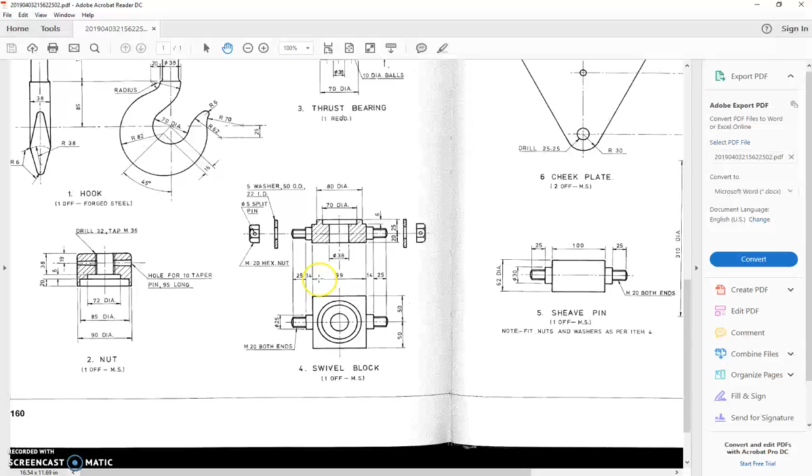I can see that it has a metric 20 thread on both ends, and another giveaway for that is the double lines that denote thread. So it's showing the outside of the thread and also the depth of the thread. Look, it's got a shoulder here that's 14 mil, 25 of thread.

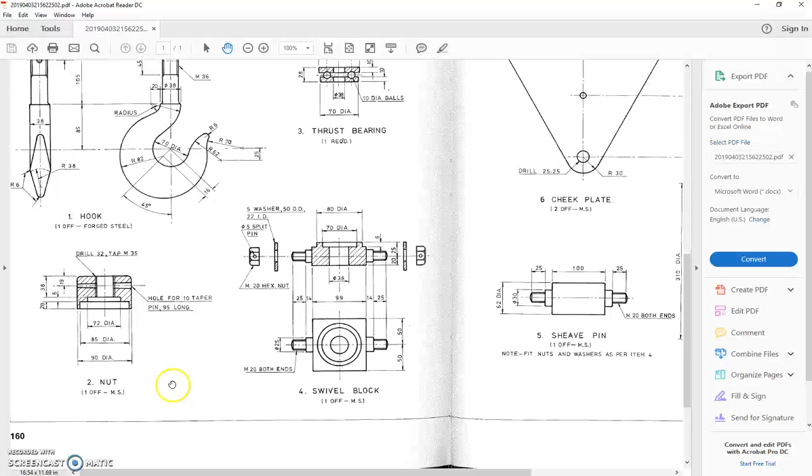These nuts and washers, we'll worry about them later. On the top, it has this ring, all right, so it sits up like that. It's 6 millimeters in height. And what happens here is that 70 millimeter diameter takes the 70 millimeter diameter of the base of the thrust bearing. Around the top of it here, 80 millimeters, it's taking that 85 millimeter diameter of the inside of the nut. So it's helping to create a barrier for dust and debris to get into that thrust bearing.

The way I'm going to draw this is very much how you see it here. I'm going to put it onto my base plane or top plane, depending on which way you want to look at it. And we'll have the front plane running through this way and that side viewed plane running through there.

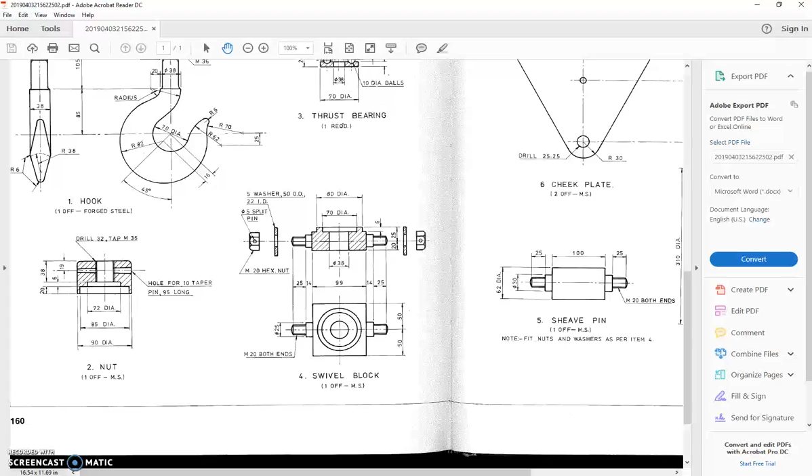Well, let's hop into drawing a new part. We'll just minimize that one. All right, so new, standard millimeter as always. Bringing up our part and our view space.

New sketch. Now, I said I was going to put it on this view here. So, depending which way you want to look at it, it's either looking from the top or the base. When I bring it in, you can see a little guide up here is this bit that says top. I do actually want to rotate that, so these little arrows up here will rotate my view cube around. So I'm looking straight down onto my XY plane this way and the other one running that way.

I'm looking at it this way because when I turn it here, that's the front. So that's going to put my drawing space in the same orientation as it is on the sheet we're taking all the measurements from. So 99 wide, 100 long.

I've changed my rectangle function from being this normal 2-point rectangle, that's what the default will be, to this 2-point center function. The way this one works is you identify the center first, really quite easy, right on the crosshairs, and then I start to drag out the size that I'm requiring. 99 millimeters wide, then I press the tab button and it flicks it over to the other dimension, 100 millimeters. Hey presto, it's done. Finish my sketch.

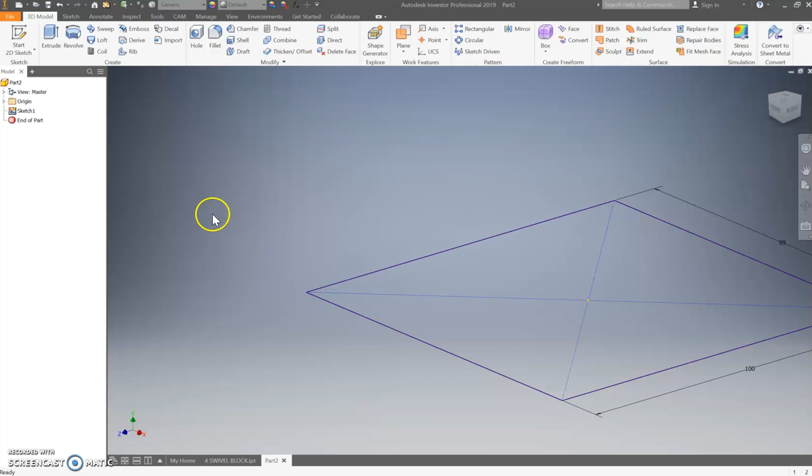Actually, you know what, I really should put a hole in the middle of this. I want to do some more work on this sketch. How do I go back to that sketch to add more into it? Just like this, if you double click on the icon, it brings it back in. Be aware though, it will probably rotate it back to its home position, so put it back how we want to be viewing it.

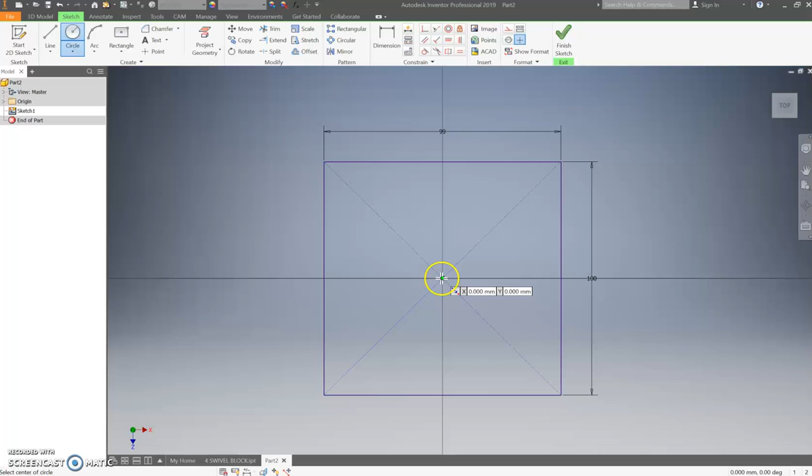In the center, there is a hole. It's essentially a clearance hole for a 36 millimeter shaft on the end of the hook. That's a fun one coming up very soon, we'll do that in a few steps. But this hole, it needs to be 36 mil in diameter. 36, enter, and away we go. Now we can finish my sketch.

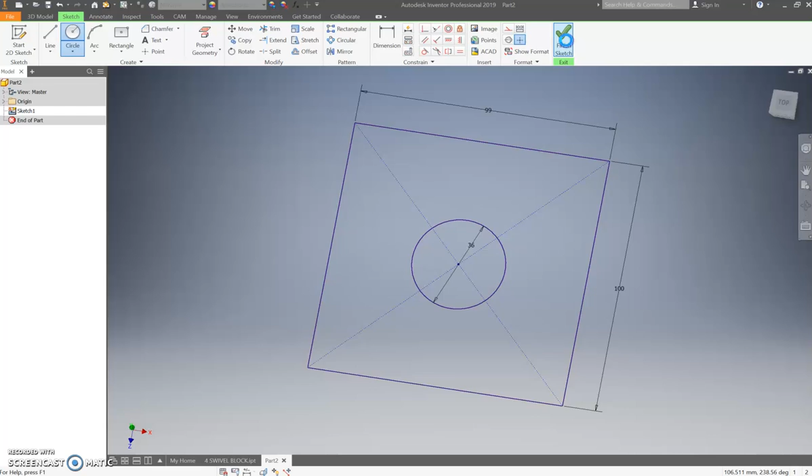We're going to extrude that up. It needs to come up a total height of 45 millimeters high, but the ring on the top, it was 6 millimeters tall. So I'm going to take 6 millimeters off, so that brings us back to 39.

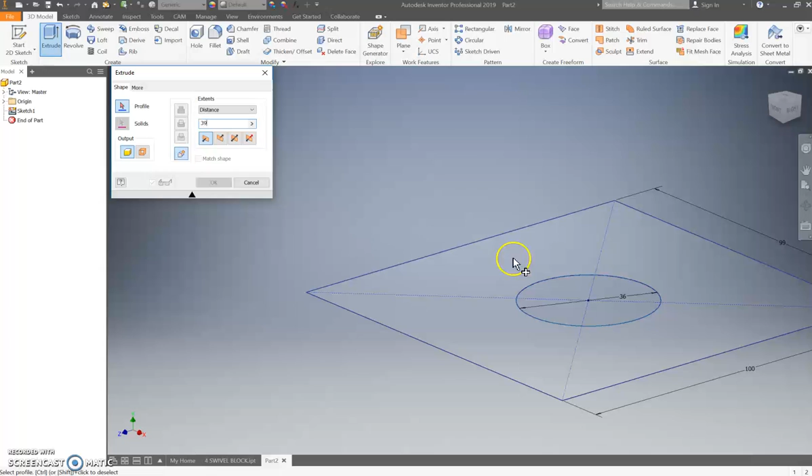Now you'll notice it's not automatically popping up and giving us that lovely extrusion straight away. That's because there's two different profiles here: there's the profile that we actually want, so inside the square and outside of the circle. If I put my cursor in the middle of the circle, it's going to project up just the circle. If I put it in that next void out, that area in between the square shape and the circle in the middle, that's the bit it's going to extrude. Okay, that's what I want.

Next, I need to put a new sketch on top of this. Just simply click on that surface at the top, and it's going to pop up with a whole bunch of icons, and that will let you start that sketch. It can let you edit the original sketch.

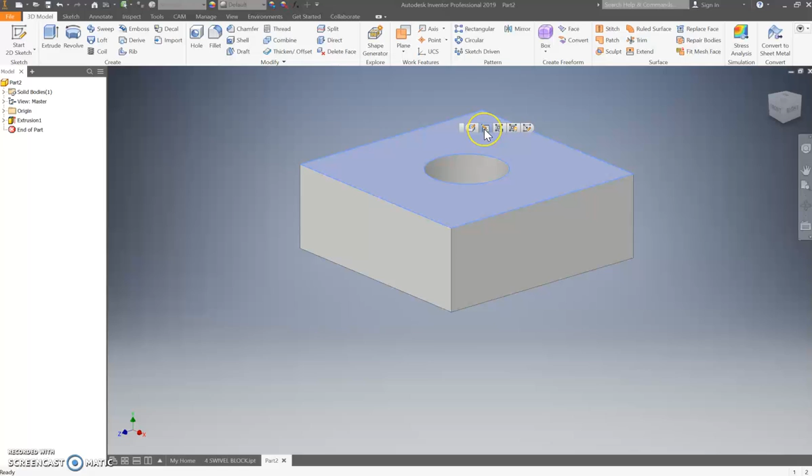You can play around with all sorts of bits and pieces in there. The last one on the right is always going to be create a new sketch. I want to draw on this surface. I'm just going to get into the habit of turning it so it's around the right way.

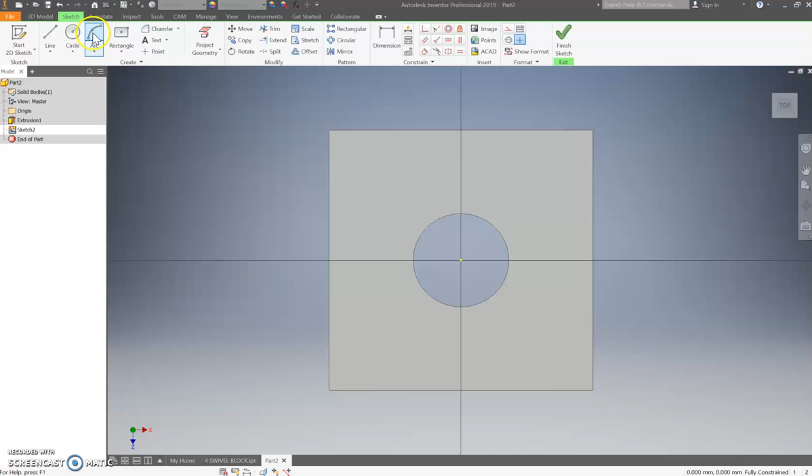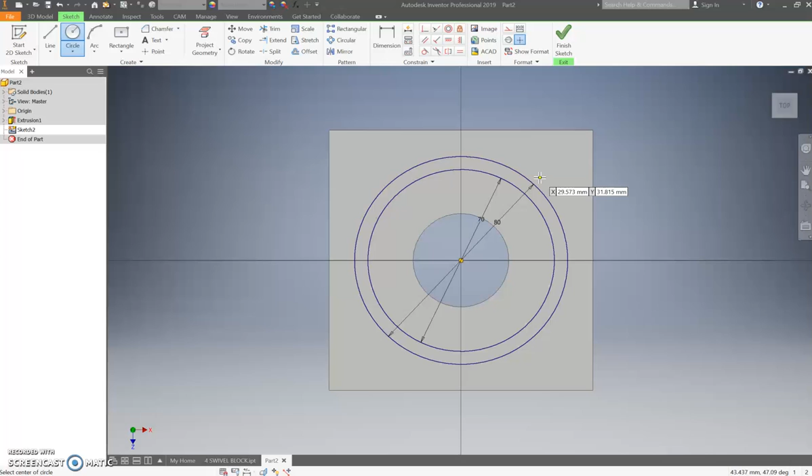I know I'm looking at it from the right direction. Sitting on top of this, there are two circles, and I alluded to their sizes before. The internal one is 70. By starting the circles on the crosshairs in the very center and identifying that point, it will lock it in and constrain it to that center point. That's one reason why I drew the base this way.

So they're both in. Finish that sketch off, and now I'm going to just extrude up that little section. It doesn't need to be 39, only 6 millimeters for this one. Okay, very good.

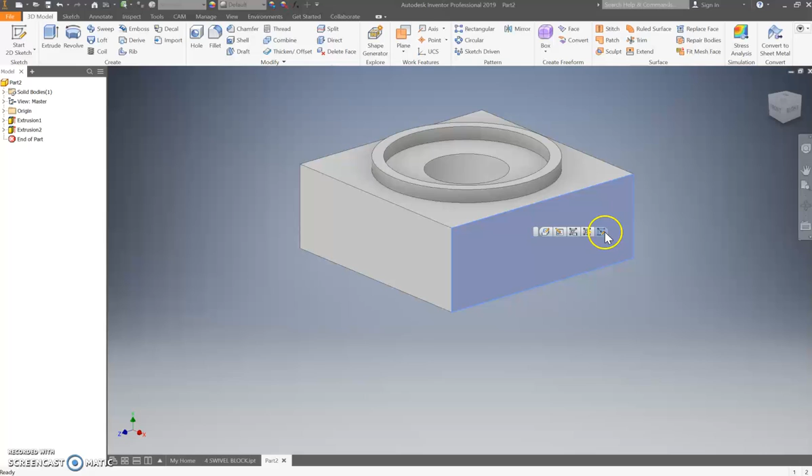Next, now look, putting these little shoulders onto this block, you could do it a couple of ways. We could just put a sketch on this surface here and draw on a circle to represent that first part. What was it, 25 in diameter?

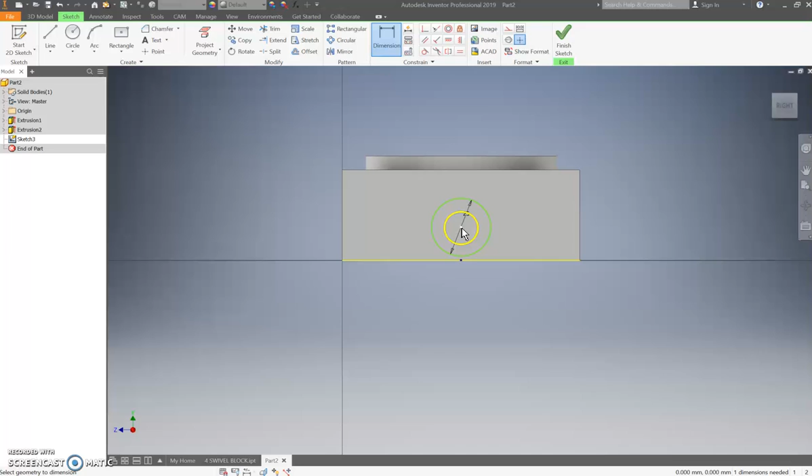I can then, this was going to go sideways. No, it's going vertical. Lovely. Line it up with the center, and I can give that a height from that baseline. All right, and I know that's sitting at 20 millimeters.

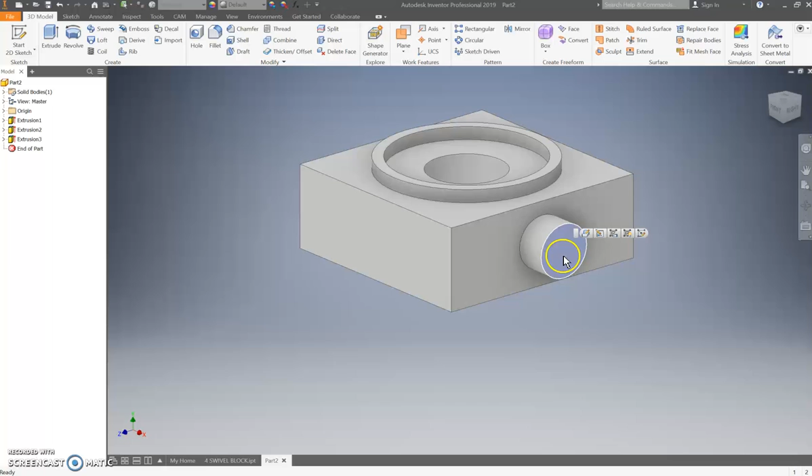Yep, so finish that one off. Extrude it out. Now it needs to come out 14 millimeters. In the center of this one, so I've just clicked on that face, new sketch, another circle.

Now this one is going to represent, now see, it won't pick up that center point. It's not turning green. If you show it the existing circle and follow it around slightly, now it recognizes that circle and you want to work with it. So now it's picking up a center point for me, green center point, yay.

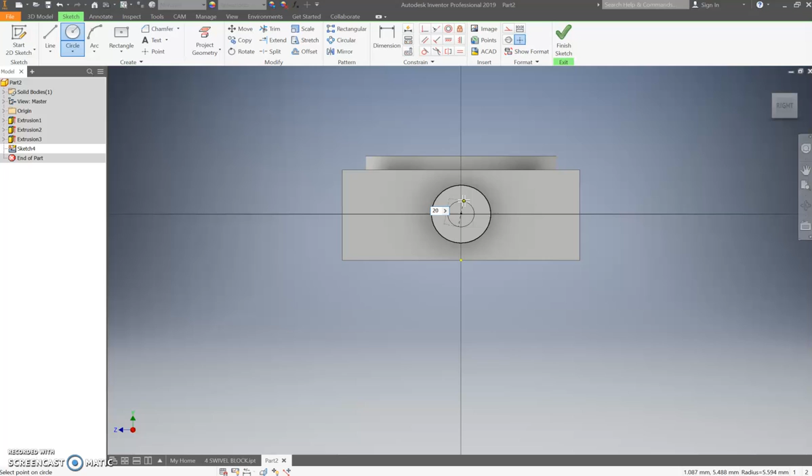Center of this one, it's an M20 thread, so the diameter is 20 millimeters. Finish the sketch again and extrude the center of that circle out, a distance of 25 millimeters. Where's 5? There we go.

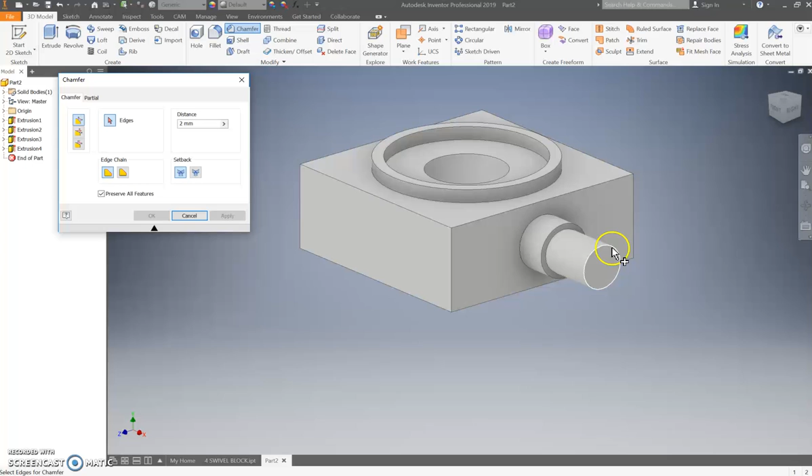Happy days. I'd like a little chamfer on the end of this because all good threads I have a chamfer on them. It's up on my other screen. Let's bring that over. Chamfer of 2 mil, right? It's a big enough object to get away with it. Okay, that's that part done.

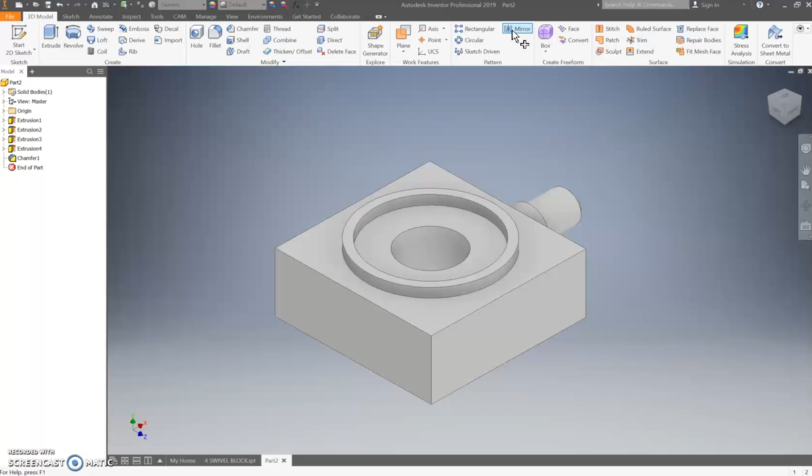Now I could repeat that same process over here, or I can just mirror it across. So the mirror command, it lives in the pattern area. Mirror. Again, that's on my other screen. Over here, please. Gives us a few options. I can mirror individual features, or I can mirror the entire thing. I want to mirror features.

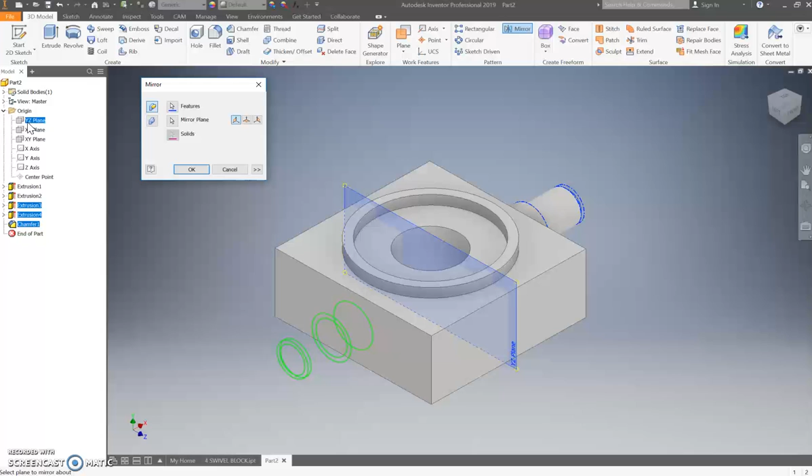I like to pick up my features from my modeling bar over here. I want that third extrusion for the shoulder, the next extrusion for the threaded section, and I also want to bring over that chamfer. The mirror plane, where does the mirror plane go? Well, I need a plane that runs through the middle of this. Where can I find that? Well, the other reason why I did this drawing on those crosshairs, I can use my YZ plane there to mirror it on, because it was centered on it. And if I hit OK, there we go. It's on.

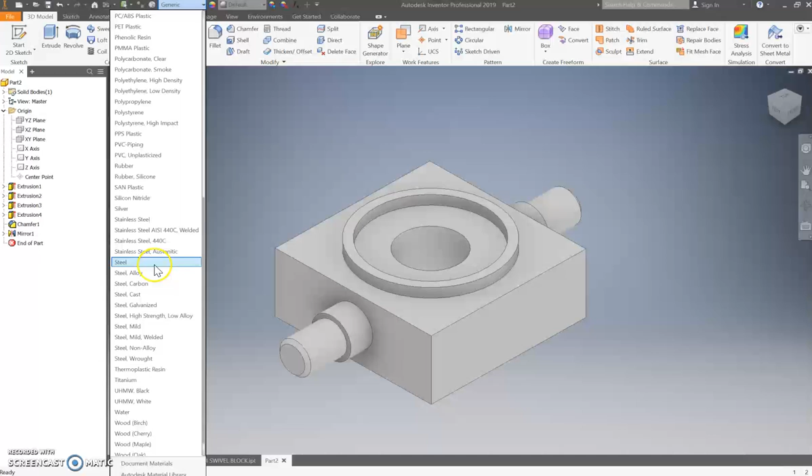Awesome. Material. It's not a generic clay, plastic, whatever material. It tells us that it is made out of mild steel. So steel, mild. What's with my eyes tonight? Steel, mild. Here we are.

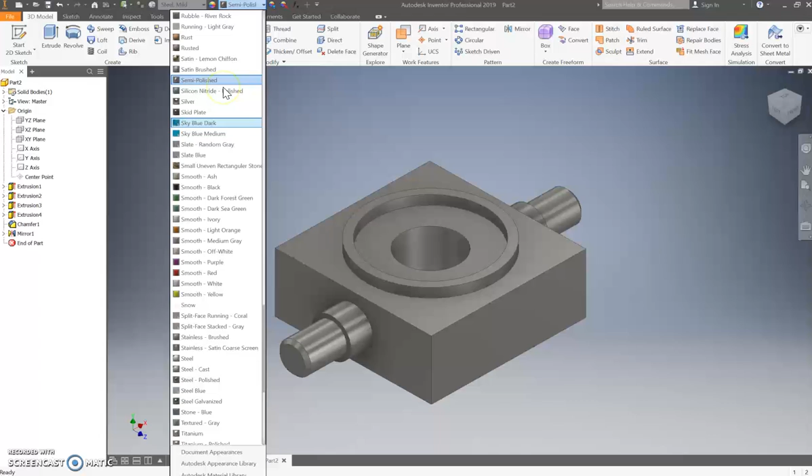Parts of it are going to be machined. This hole, this surface, this one too, and probably the top. These will be machined as well. All right, so we'll hop in here to the surface finish. Let's say, before I do that, I want the whole thing to be yellow. It'll get painted.

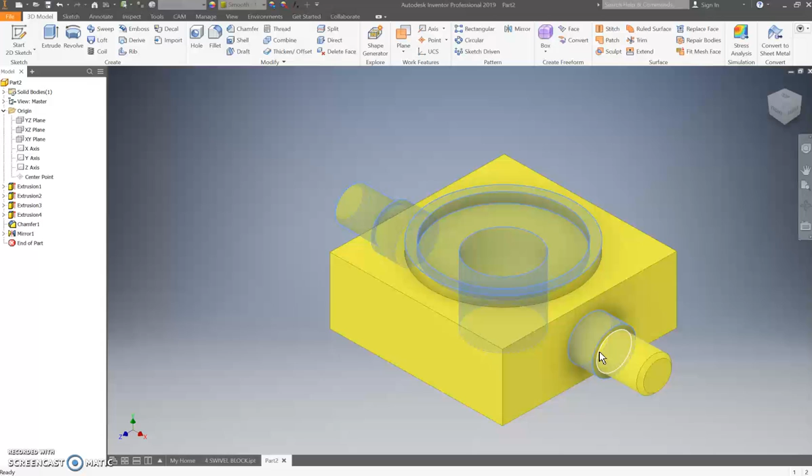Control button, which surfaces get machined? That one, that one, that one, and that one. Probably that one, and I'll say the end of that. So rotate it around slightly. That one. Okay, all of those ones.

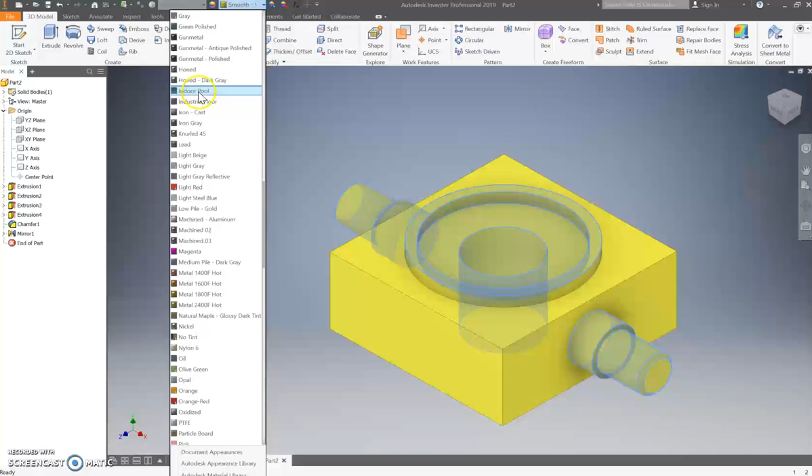These ones will be honed. Oh, that looks good, doesn't it? That's not much fun at all. Smooth. Oh, here we go. This is better, isn't it? Honed. There we go. I'm pretty happy with that at this point, I must say.

So, it is actually a pretty simple shape to draw. There's one thing I haven't put on, is threads. Lucky I noticed now. This is pretty easy, this bit. Look, you should say, look, I want to put a thread. What surface does it need to go on? Check the specification. If it's not in this ANSI metric profile, go and find it.

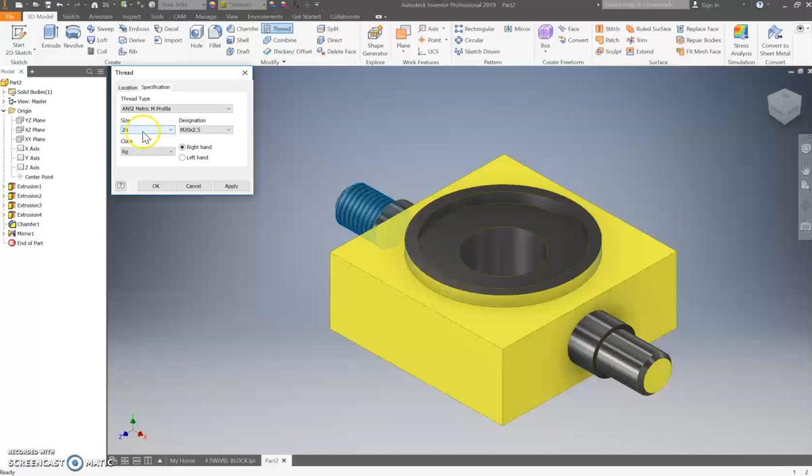It's not hard. 20 millimeters, yes. Right hand thread, excellent. Apply. I say apply because this one needs it as well. I'm finished with it. Okay.